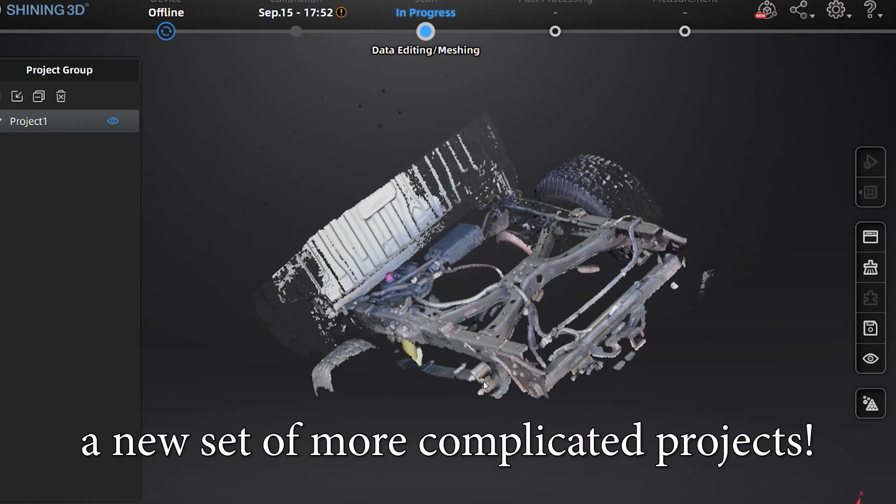My projects always take a lot longer than what I think they would take. And once in a while, these projects also start out a new set of more complicated projects. My custom shackle flip on the Tacoma is the can of worms that accomplishes all of that. So let's get this thing started.

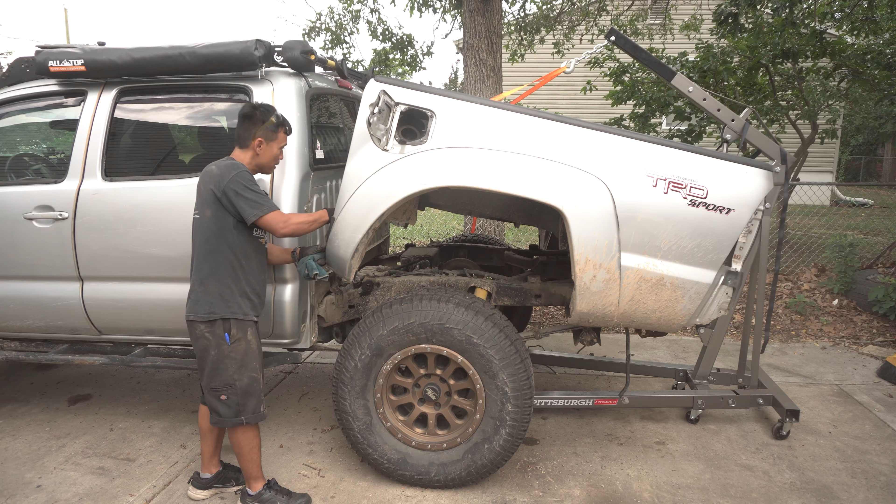In the last video, I briefed you guys on how I de-bedded my truck. Now with the back of my truck completely naked, it was time to expose it to one of my new toys.

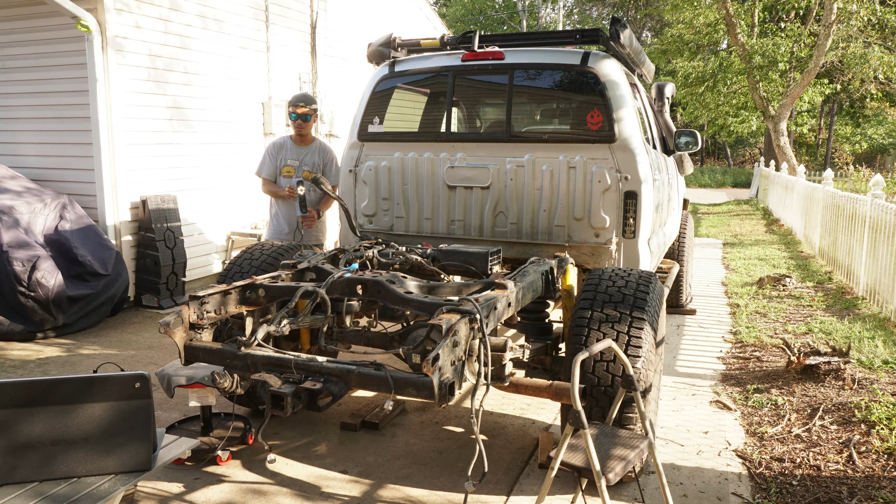Introducing my new 3D scanner. This is the Einscan 3D scanner, which I bought back in March 2023 and finally got around to using it 7 months later because I'm good at buying things, which will sit for months before I can use it. And I'm sure many of you guys can relate. Now there is a learning curve with using this 3D scanner, and it's not as easy as it looks.

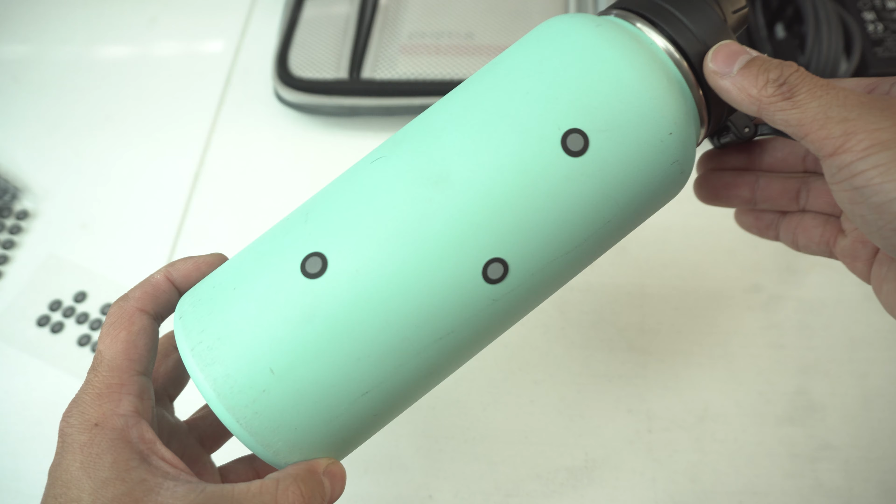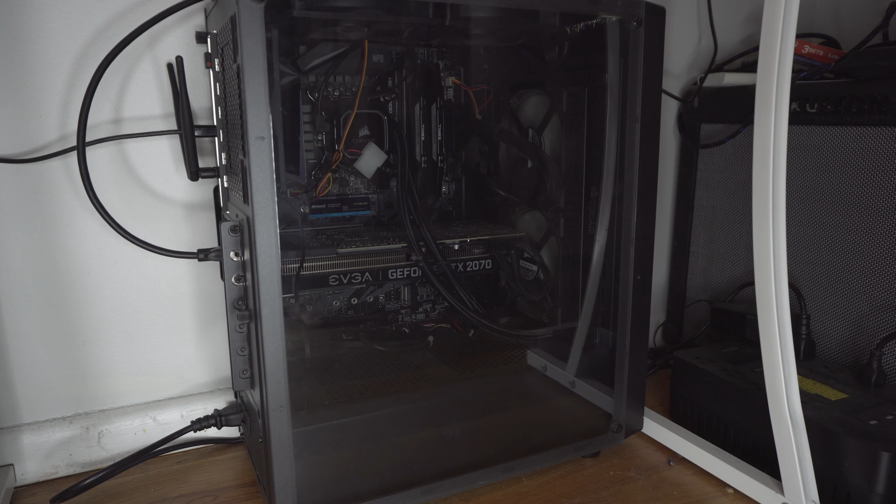For the long, wide, and smooth surfaces, I did need to use these stickers. These are 3D scanning dot markers so that the scanner doesn't lose its place, which happened quite often. The other thing to consider, if you are planning on purchasing this 3D scanner, which I'll link in the description down below, is that you do need a pretty powerful PC in order to run the software and the hardware.

Anyways, I did get a really nice scan of the naked rear end of the truck, as well as a more detailed scan of the rear of those leaf springs with and without the spring hangers. That way, I can design my custom bed project, design my custom shackle flip idea, and also fantasize about my truck at night without anybody looking.

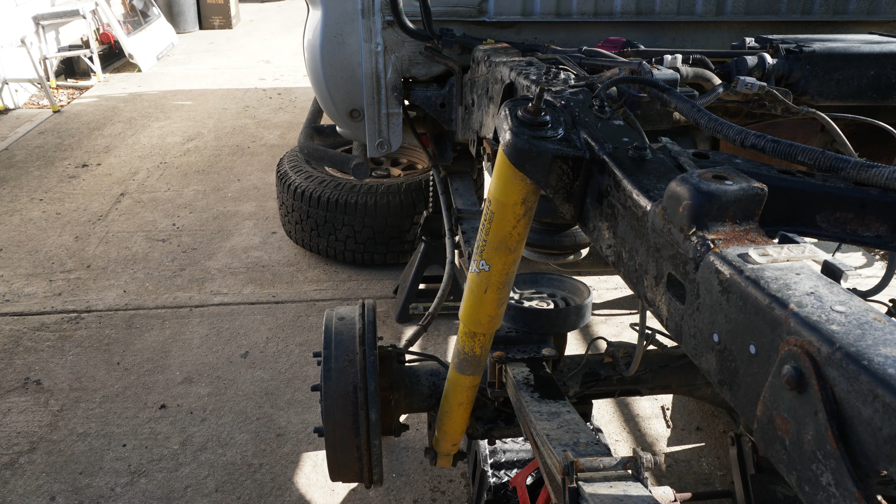I supported the frame and the rear axle with some jack stands and took off the struts and the lower cradle for my airbags. The shackle removal part is the easy part. 2 sets of nuts and bolts, and that shackle was quickly taken apart. The leaf springs are completely free from the rear hangers on the frame.

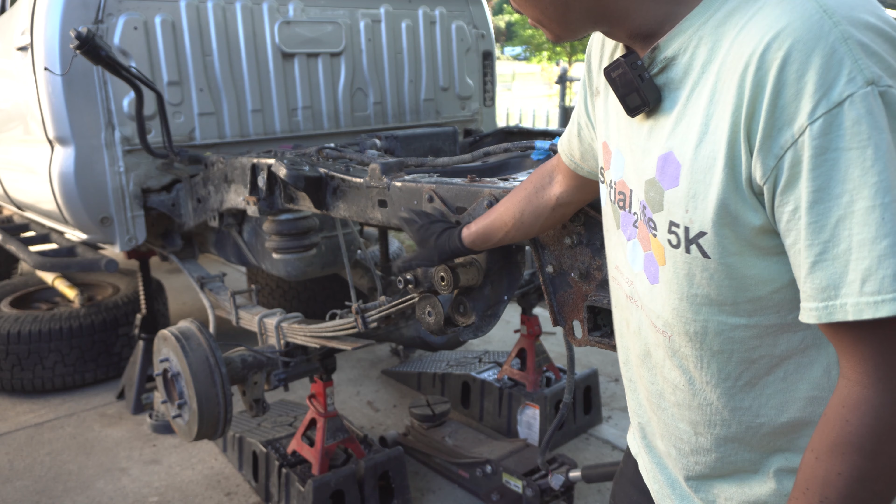I did that on both sides. The axle is supported by those 2 lower jack stands now. And this basically should allow us to remove this rear spring hanger completely. And these look like it's just 4 rivets. So we'll just use an angle grinder to cut those things off.

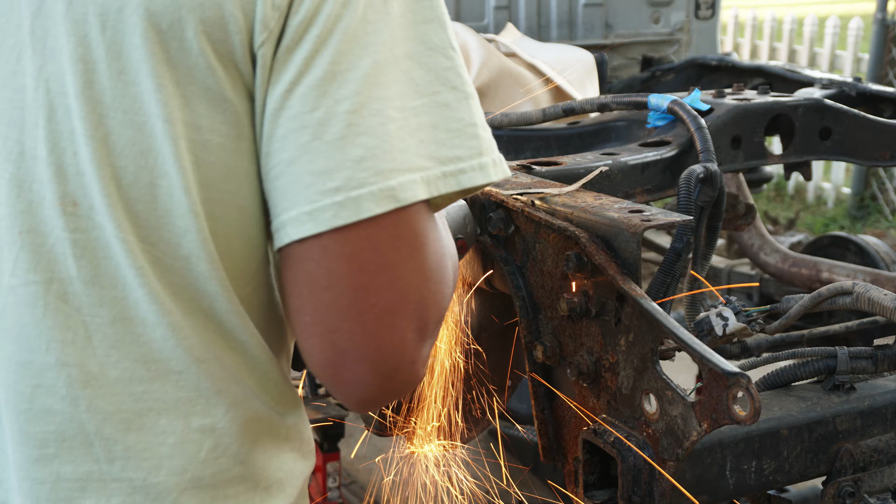Don't let the 'this is just 4 rivets' fool you. This job is gonna suck, and you're not gonna have fun. Trust me, it sucked. I did not have fun. It was a lot of cutting, grinding, and pounding in order to completely hammer off that spring hanger.

And removing those rivets completely from the frame, that took a lot more drilling, grinding and pounding. Prepare to have some very sore wrists, guys. But what I did find most effective was taking my angle grinder, cutting the heads of those rivets, then using a pin punch basically to start a small pilot hole down the middle of that rivet, and then drilling it out with a 1/2-inch drill bit to remove those rivets completely.

And mind you, you do have to drill them at low speeds, high pressure, with a lot of lubricant so that the tips of those drill bits don't go dull on you. Now, drilling out those 8 rivets took a few hours to do, and boy, that was not fun. If I had to do it again, I'd probably try it out with my plasma cutter and just carefully remove the material in the middle, and then probably finish it up with that 1/2-inch drill bit to clean up the edges.

Now, why a shackle flip? Before I answer that, let's break down the Tacoma's rear suspension first. The rear suspension on the Tacoma is essentially a spring and damper system, with the spring being the leaf spring, duh, and the strut being the damper.

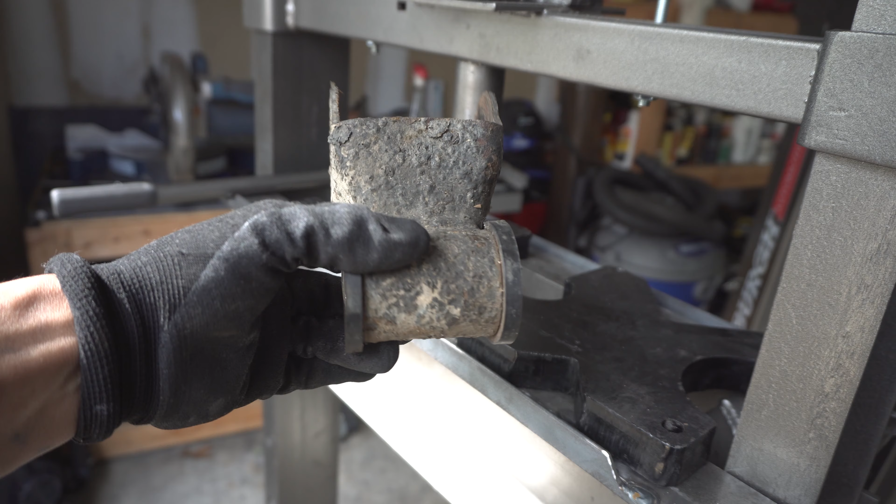A leaf spring is basically mounted on one side to the frame and the other side on a pivot arm, and that pivot arm is called a shackle. That shackle can be oriented so that it's under the leaf springs, which is called a tension shackle, or on top of the leaf springs, which is called a compression shackle.

The stock design on the Tacoma's rear suspension is currently a tension shackle. The tension shackle is definitely stronger since the metal itself is in tension, so there's no chance of that metal buckling under load. There's also a lower roll center for the truck with a tension shackle, meaning it's more stable at high speeds and turning.

Now, there are also disadvantages to this design. One is that the ride is a little bit stiffer, and two is that the droop of that rear suspension is also very limited, because the shackle moves in a different direction than the axle when it's coming down. We'll go more into that, because there are exceptions as well.

Now, with a compression shackle, you do get a taller ride height for the rear without the need of a lift, and that's an advantage when it comes to off-road driving. This design also allows that rear suspension to droop down even further, and you also get a little bit of a softer ride.

Now, it also does have some disadvantages. It has a higher roll center, and the up travel is much more limited. I can certainly go on and on about compression versus tension shackles, and as usual there are always exceptions, including if you have high arch leaf springs at the rear, you can actually get more travel with a tension shackle versus a compression. So there are little nuances like that.

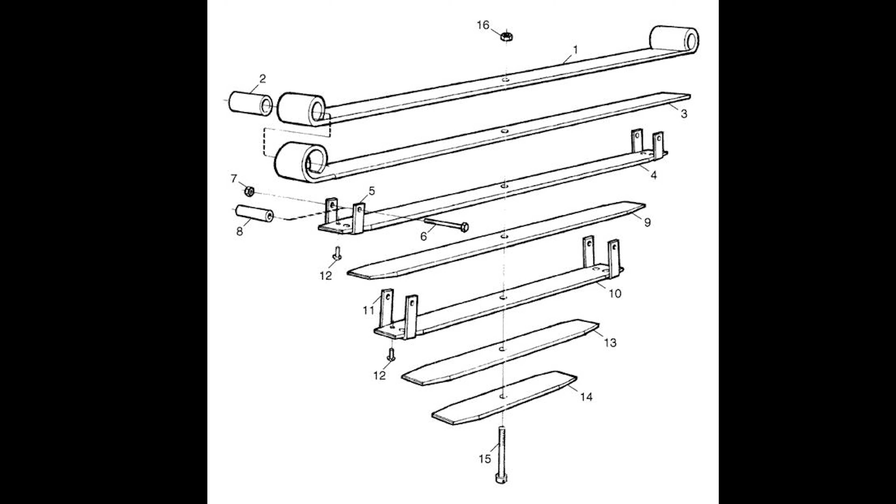So let's take a look at what a leaf pack is. A leaf pack is a set of bowed spring steel. The more it is flexed with the load, the more each of the lower leaves engage with the leaf above it. So as the leaf pack gets more compressed, the stiffness gets higher and higher as more of the leaves engage with the truck's weight.

If we reduce that leaf pack too much, then it flattens out and starts bowing in the wrong direction, and that's when we get the Carolina squat. That's not a good look. Also, that suspension is probably bottomed out and you won't have any more up travel. Now, the goal is to have that leaf pack still bowed in the right direction while the truck is fully loaded.

Now, how will this all work out with my setup? Because I do have that 1,000-pound four-wheel camper, and sometimes I roll without all that weight in the back in order to still go do some four-wheeling at tougher terrain. We'll get into solving that and more in the rear suspension series.

Now let's talk about the design constraints when it comes to designing this rear shackle flip. Now, I do want to put longer shackles at that rear spring, so in order to do that, I'll have to move that pivot point further forward on the frame. Now, I can't put it too far forward or have the shackle too long, because the rear of the leaf spring will just slam right into the frame.

The frame actually tapers towards the rear and it's not parallel, so we'll have to take that angle into consideration when designing this rear spring hanger. Last but not least, we're also going to be using some of the existing mounting holes.

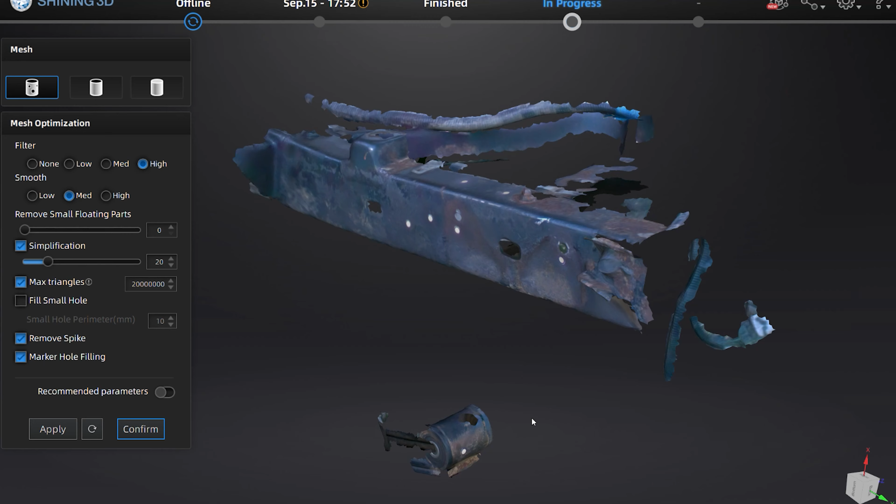Easy enough, right? Now, in order for me to figure out the maximum allowable length for that rear shackle, I did have to get that rear suspension to droop as far down as possible. The 3D scans that we did earlier helped me determine the proper angle for that rear shackle hanger. Now, using my CAD software, along with some cardboard, I was able to at least mock up and design some rough prototypes in order to figure out the manufacturing, the fitment, and the overall movement of the suspension as we cycle it up and down.

Now, it took about 11 designs and 2 failed prototypes in order to get to this final working model. That final design we'll install in the next video, so definitely stay tuned.